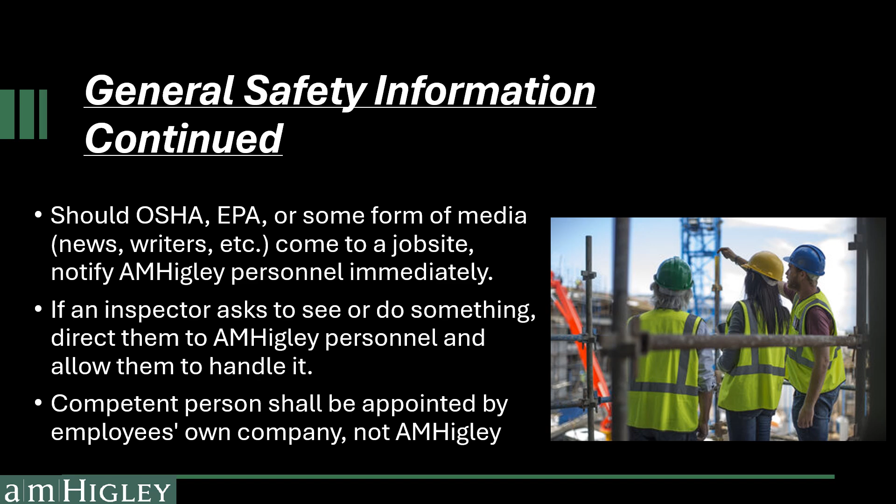A competent person is defined as one who is capable of identifying existing and predictable hazards in the surroundings or working conditions which are unsanitary, hazardous, or dangerous to employees, and who has authorization to take prompt corrective measures to eliminate them. AMHigley is not responsible for appointing competent persons for subcontractors on a job site. It is the subcontractor's responsibility to appoint their own competent persons.

All safety documentation will be completed and uploaded in HammerTech. This is the software system that AMHigley uses to keep track of orientations, inspections, trainings, and meetings. Through your smartphone or iPad, you will be able to browse the HammerTech website and submit different documents to AMHigley.

Each week, toolbox trainings and weekly huddles must be completed and submitted. Additionally, equipment inspections, trench inspections, hot work permits, confined space permits, and excavation permits must be completed before first use or work begins. QR codes are posted in the job trailer that will take you directly into HammerTech to complete the various inspections, permits, or forms.

If you are a foreman for your company, our AMHigley superintendent will add you as a nominated representative, so you have access to upload the required documentation. After the orientation, please get with the superintendent so they can show you how to complete and upload the required paperwork while on site. Thorough instructions on how to use HammerTech can be found under the Documents tab.

We do enforce a safety violation policy. A Category 1 safety violation simply means that the exposure to a hazard, if not corrected immediately, could result in an incident leading to serious injury, significant property damage, or in extreme cases, death. Examples are lack of fall protection for anyone working at or above 6 feet, improperly protecting trenches and excavations, not following confined space procedures, lockout-tagout procedures, etc.

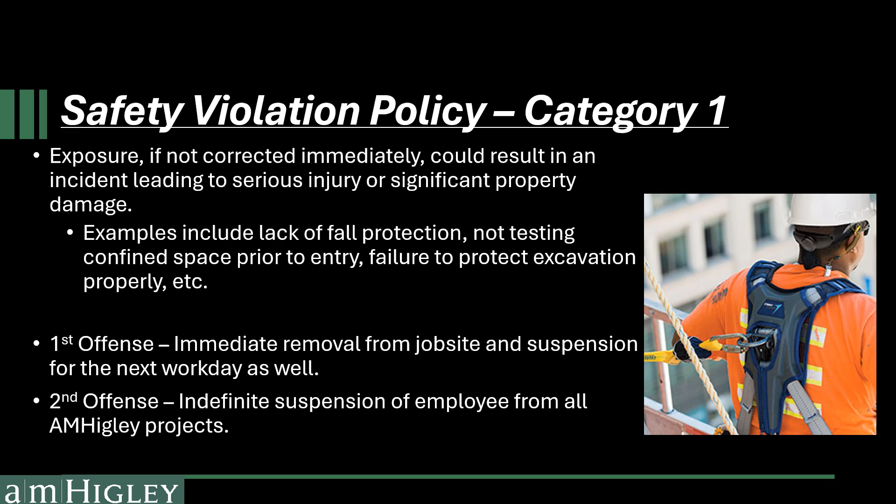The employee's supervisor will receive a Category 2 violation for lack of oversight to the employee not following work procedures or from failing to set up the worker with proper equipment. Upon your second offense, you will be suspended indefinitely from all AMHigley projects.

Our other type of violation is a Category 2 violation. This category entails a hazard that, if not corrected immediately, could lead to injury or minor property damage.

Your first offense will lead to a written warning. Second offense will lead to another written warning. Third offense will lead to a suspension from the project for the rest of the day, plus the following workday. Examples include failing to wear PPE, not having silica engineering controls in place, ladder usage, and more.

Violations stay on your worker profile for 1 year, but may stay on for longer periods due to the severity of the hazard. If 3 or more workers are found without PPE, a violation will be issued to the foreman for lack of oversight to the employees not following work procedures. Lastly, failure to sign and acknowledge any safety violation will result in immediate suspension from all AMHigley projects.

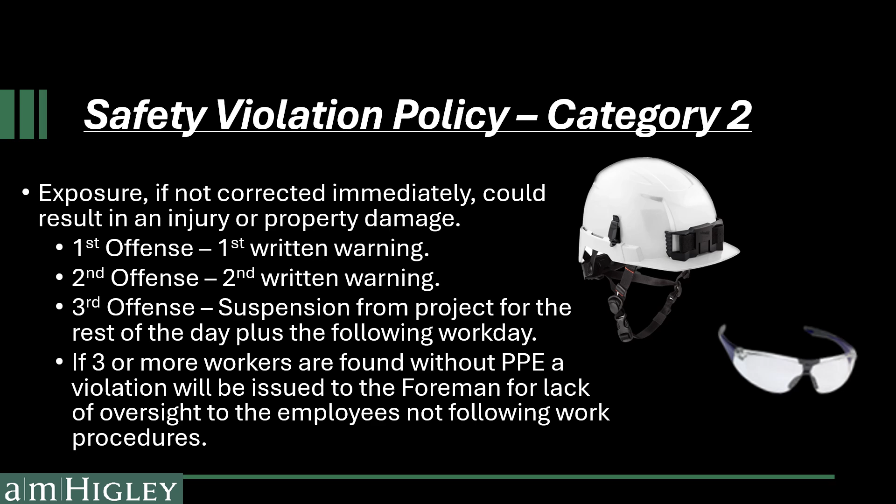When setting up a job site, one of our greatest priorities is public safety. We must take necessary actions needed to protect and maintain the public use of roadways, sidewalks, entryways into buildings, lobbies, corridors, and more. Roadwork must be set up correctly with barricades, signage, and reflective devices.

When necessary, sidewalks shall be protected with sidewalk sheds, canopies, catch platforms, fences, guardrails, barricades, shields, and more. If we must obstruct the use of sidewalks, ramps, stairs, or walkways, we must create a new temporary safe route for the public to use.

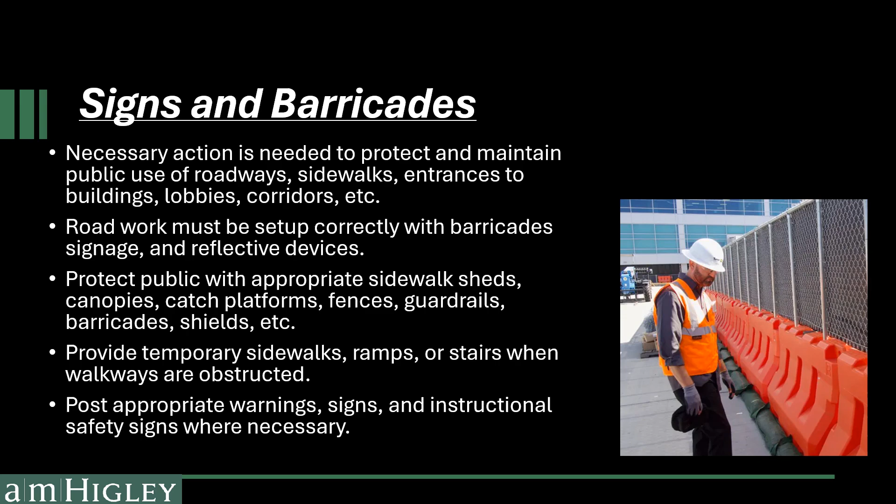Appropriate signage shall be posted around the job site. Signs posted on fencing around job sites may say the site is a construction area, no weapons allowed, no smoking allowed, PPE required, and more. It is important to make clear to the public that there is a construction site ahead of them and there is restricted means of access.

Proper housekeeping reduces unnecessary and avoidable hazards such as slip, trip, and fall hazards. Cleaning your work area routinely will help eliminate these hazards for you and those around you. When sweeping debris and dust, always use sweeping compound, HEPA vac, or water misting to control airborne dust. Refer to the manufacturer spec sheet and guidelines on how much sweeping compound to use per the square foot area.

Impalement hazards shall also be protected on a job site. This includes, but is not limited to, rebar, steel form pins, nails and debris, and more. Anytime you are using stairwell pan treads that are not filled in as a means of access to another level, you must temporarily fill in the pans to eliminate tripping hazards.

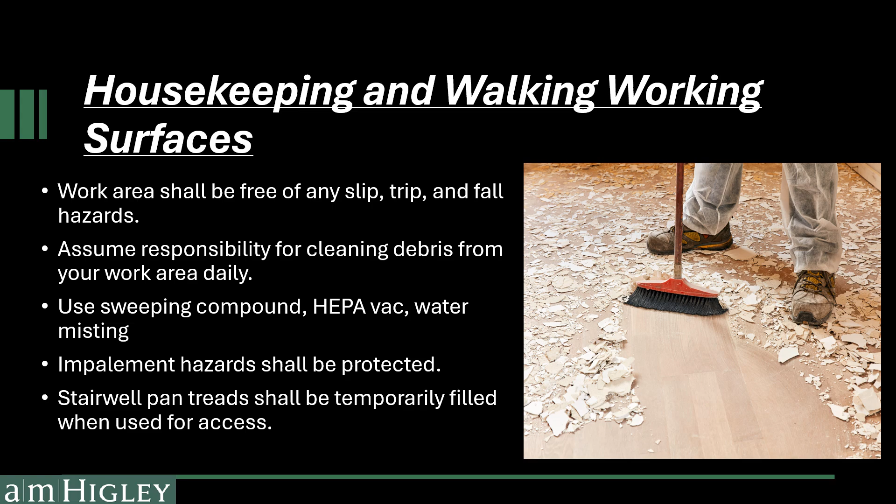We require anyone that is on a job site to always wear PPE. Your helmet and safety glasses shall always be worn. If you wear prescription glasses, they shall be ANSI Z87 rated for impact resistance with side shields.

When working at a decibel level at or greater than 85, you should be wearing hearing protection. A good rule of thumb to know whether you are working at a decibel level greater than 85 is if you must raise your voice to have a conversation with someone. Activities that commonly raise decibel level to this point are drilling, chipping, grinding, and cutting.

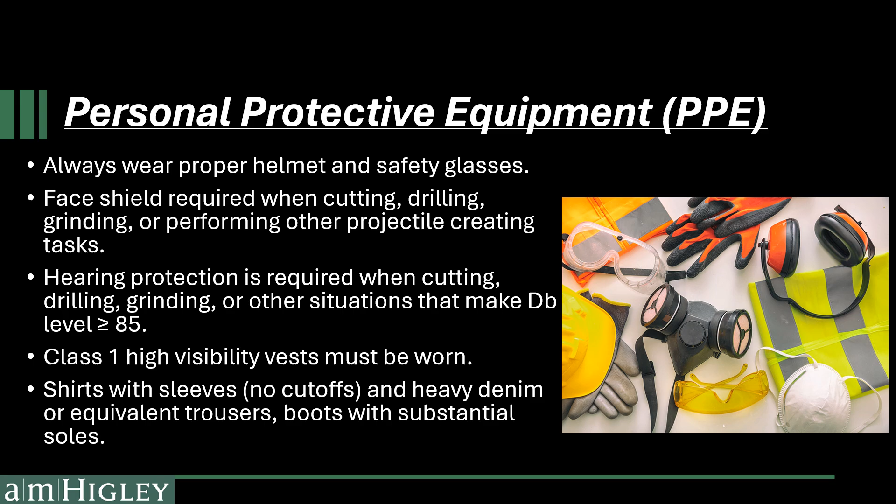We require a Class 1 high visibility vest when working near moving equipment or vehicle traffic. You shall always wear shirts with sleeves, heavy denim or equivalent trousers, and boots with substantial soles. Tree clearing tasks require a helmet, hearing protection, full face shield, leg protection such as chaps, and work gloves.

Continuing on the subject of PPE, here are some of AMHigley's helmet requirements. Workers are required to wear EN 12492 or ANSI Type 2 helmets. These helmets shall have a strap attached to them that shall be buckled around the chin at all times, with no more than 2 finger widths of slack between the strap and chin. If you do not have one of these helmets, notify your supervisor immediately following the conclusion of this presentation, and one will be provided at the cost equal to AMHigley's cost.

A fire extinguisher must be within 100-foot travel distance of any work and clearly visible with a monthly and annual inspection tag. When inspecting the fire extinguisher, check accessibility, examine the physical state, check the gauge, look for damage, and make sure to sign off on the fire extinguisher inspection tag when finished.

All flammable or combustible liquids must be stored in an appropriate container. No more than 25 gallons of flammable liquids shall be stored in a room outside of an approved storage cabinet. Gasoline and diesel must be stored in a metal gas container with a flame arrestor. No plastic gas storage cans are permitted. A fire extinguisher must be located no closer than 25 feet and no further than 75 feet from the storage area. Carbon monoxide monitors must be used when any powered equipment or fuel-powered heaters are used indoors.

When not in use, all compressed gas cylinders must be stored upright, secured, and with valve caps in place. Additionally, all oxygen cylinders must be separated from fuel cylinders by at least 20 feet or by a 5-foot tall non-combustible barrier with a half-hour fire rating. If fuel storage tanks are to be utilized, they must be protected from vehicle traffic by jersey barriers and equipped with a spill kit and be bonded and grounded.

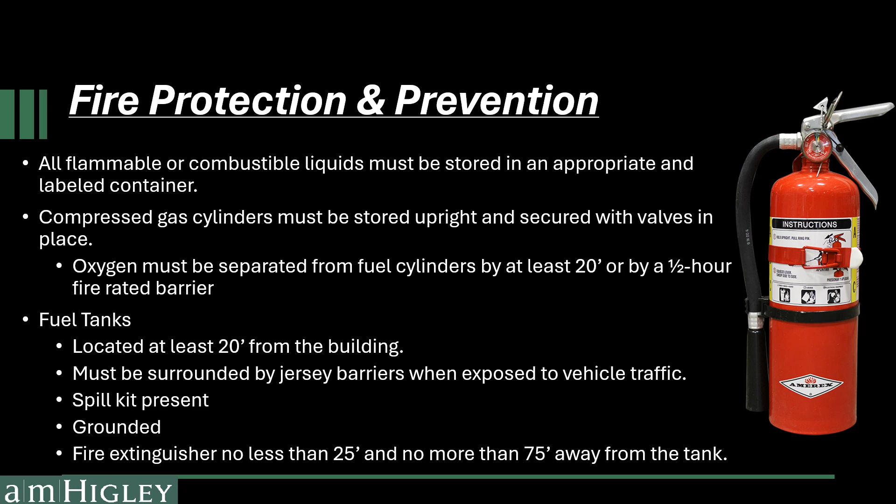When using hand or power tools, it is important to use them only for their intended purpose. Otherwise, tools can pose a hazard. Tools being used shall not have any defects, otherwise they shall be removed from service. If a tool is designed to accommodate guarding, then guarding shall be used. For example, table saws must always have guards in place.

Do not throw tools as a means of transferring them from one place to another. Do not raise or lower a tool by using its power cord. If operating a powder-actuated tool, discard unspent and partial cartridges in a bucket of water until ready to dispose of properly. Any defective tools must be red tagged and removed from service.

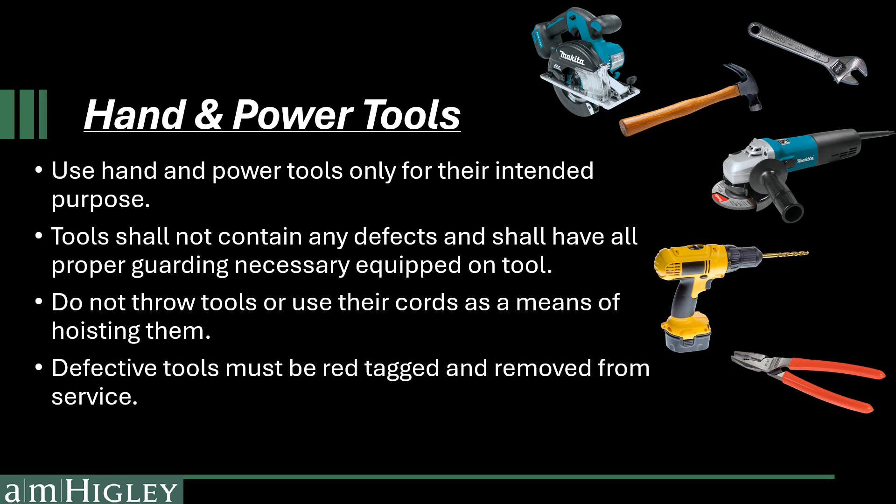Before using a ladder, always inspect the ladder prior to use. Make sure you check for the load capacity rating. If you cannot find this label, it must be taken out of service. Inspect the ladder for missing or loose rungs or steps, damaged slip feet, cracks, corrosion, spreaders, holes, and do not fasten anything to the ladder.

Do not use a ladder outside of its intended purpose. This includes not standing on the top cap or top step of a portable ladder. Do not use a portable ladder in the lean position unless it was designed to be used for that purpose, such as a lean-safe ladder.

When using an extension ladder, ensure it is set up correctly using the 4-to-1 rule. For every 4 feet the ladder rises, the base needs to be 1 foot away from the wall. This allows for maximum stability.

When an extension ladder is used for access to an upper landing surface, the ladder side rails must extend at least 3 feet above the upper landing surface to which the ladder is used to gain access, and be secured to a rigid support. Always maintain 3 points of contact on the ladder when climbing. Keep your body near the middle and always face the ladder.

Anytime there is a break in elevation of 19 inches or more, a ladder or stairway must be provided.

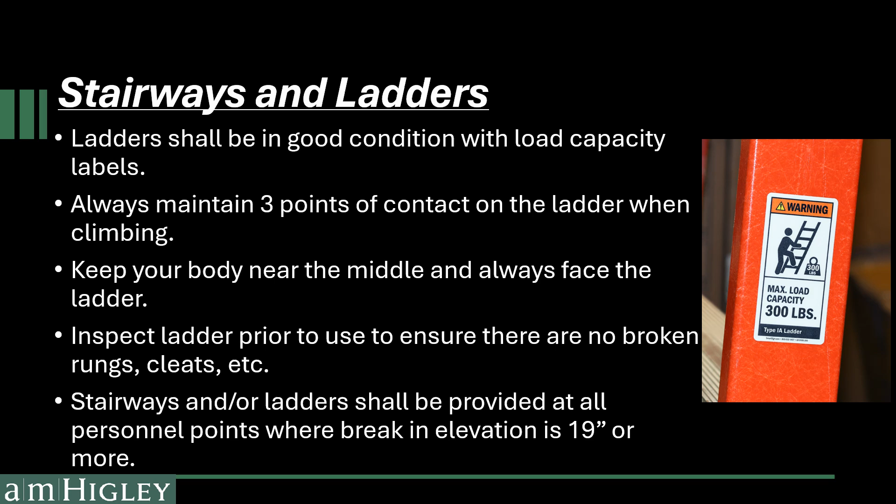Moving into electrical hazards. When using extension electrical cords, there are a few things you should be looking for. The biggest issue we see with electrical cords is a lack of general organization. Cords shall be organized in a manner that will not damage the cords. This means things like not laying the cords on metal track or pinching them in doors.

Cords shall also be organized in a manner that keeps them from posing housekeeping issues such as tripping hazards. All cords, temporary heating lines for the winter months, and any others shall be elevated with quick hooks or other non-conductive material to prevent a trip hazard.

All cords shall be equipped with a grounding pin, and there shall also be no insulation damage or tape repairs to the cords. Do not daisy chain cords.

When an energized electrical junction box is present, it shall be protected from incidental contact as well as water with a cover plate on. All electrical cabinets and panels shall be locked, have a locked electrical room door, or individually lock and tag out each breaker.

Also, there shall be no debris restricting access to the area. All temporary lighting power splices shall be protected from incidental contact.

Unless the repair's quality is equal to that of the cable, repaired cables are not permitted. Approved repairs are those that are repaired with rubber and friction tape or other equivalent insulation.

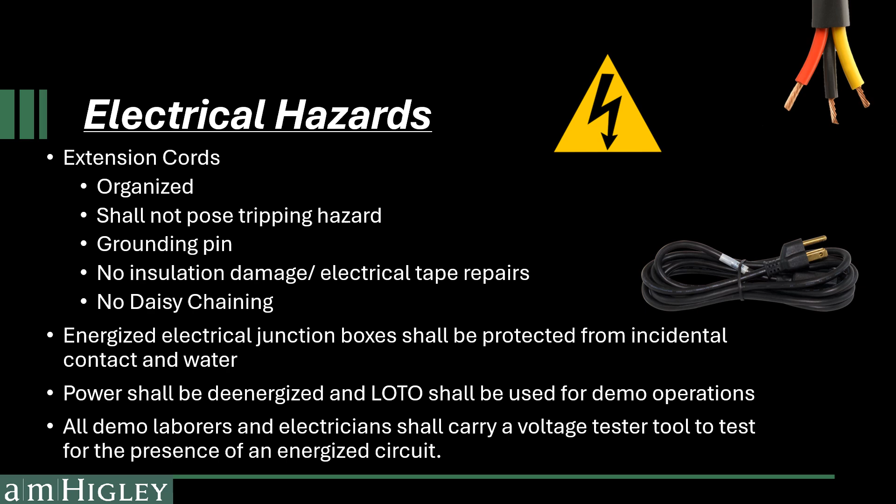When a demo operation is taking place, power shall be de-energized and lockout tag-out should be utilized. All demo laborers and electricians shall always carry a voltage tester on them to test for an energized circuit.

Moving along with fall protection. Anytime you are planning on working from heights, a pre-work meeting and a job hazard analysis must take place to discuss tasks, hazards, and how your company plans to eliminate and control the hazards.

There is no safe distance from an unprotected side or edge that would render fall protection unnecessary. We require anyone working at or above 6 feet to have a fall protection plan, whether it be a guardrail or a personal fall arrest system or restraint system, which consists of an anchorage, body wear, and connecting device. This also includes working at or above 6 feet on scaffolding and steel erection.

You must be tied off 100% of the time when working at a height at or greater than 6 feet when a guardrail is not present. Also, you are required to have a rescue plan in place if somebody would fall.

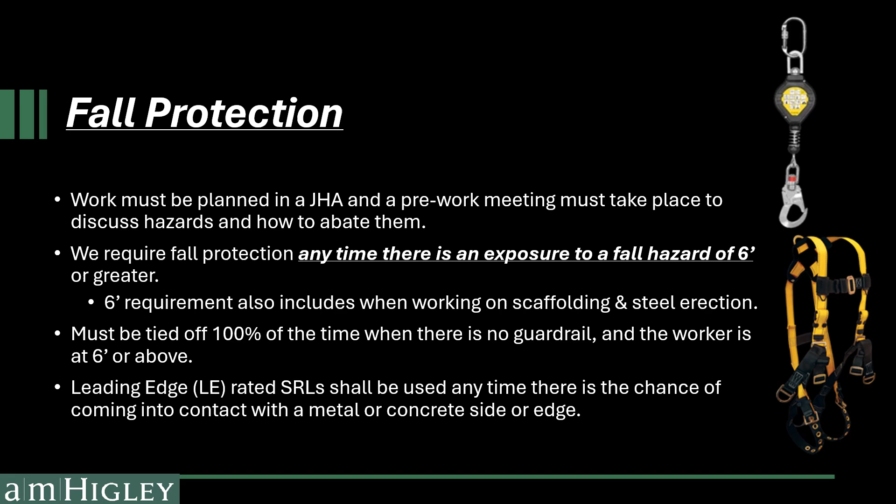There is a limited amount of time to rescue someone in the event they have a fall, so it is better to have the rescue plan devised prior to the fall rather than during the rescue.

When you are using a personal fall arrest system, your anchorage point must be able to support 5,000 pounds of force per person attached. When using a temporary hinge anchor or other types, always refer to the manufacturer instruction manual to know what the anchor capabilities are and what it is designed for, such as wood, metal, or concrete.

Also, know which type of fastener to use, how many fasteners are required, and the correct layout of the fasteners on the anchor, so the anchor will meet the 5,000 pounds of force. Inspect your fall protection equipment before you use it each time.

Ensure your body harness impact indicator shows no signs of deployment, no corrosion, cuts, burns, paint damage, and is adjusted correctly with dorsal D-ring between your shoulder blades.

Ensure the connecting device is rigged such that an employee cannot free fall more than 6 feet.

Body harness must be equipped with suspension trauma straps. Should warning lines be chosen as the fall protection plan, they shall be a minimum of 15 feet back from the unprotected side or edge, unless you are a roofer, in which they can be 6 feet from the unprotected side or edge.

Guardrail systems are in place with top rail at 42 inches plus or minus 3 inches and can support 200 pounds in any outward or downward direction. Mid-rail can support 150 pounds, and a toe board at 3.5 inches can support 50 pounds of force. If using wire rope as guardrail, it must be flagged at 6-foot intervals.

Any openings 30 inches or higher and 18 inches or wider in a wall or partition shall be protected. Any gaps, voids, or holes 2 inches or more shall be covered, secured, and labeled as hole cover, or they shall be color-coded. They shall also be capable of supporting twice the weight of employees, equipment, and materials.

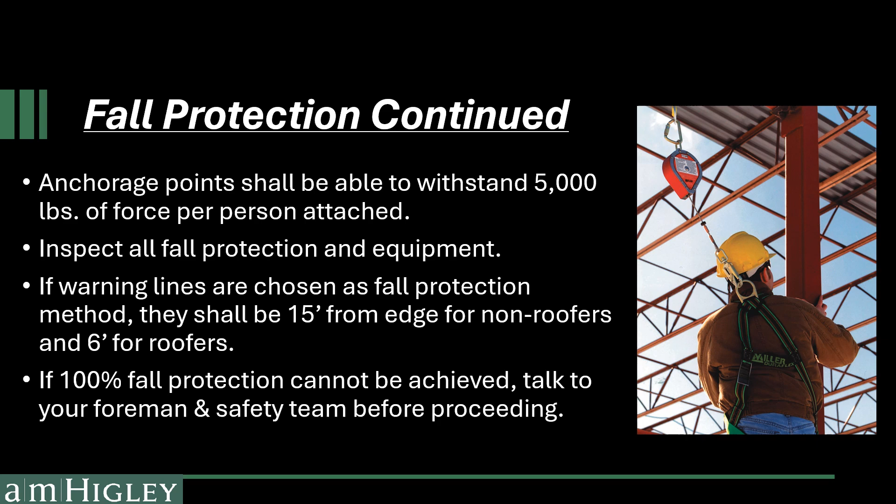If you don't believe that you can safely achieve 100% fall protection, talk to a member of the safety team prior to starting work. We will work with you to figure something out safely and effectively.

When using scaffolding, there are a few key points to keep in mind. First, scaffold shall be inspected and documented prior to every shift. When erecting or dismantling scaffolding, a competent person needs to be on site to inspect and ensure the procedures are safe. A personal fall arrest system shall be used, unless it is deemed infeasible.

Guardrails or a personal fall arrest system is required when working at 6 feet or greater. Your personal fall arrest system must be equipped with a self-retracting lifeline. This is to ensure your safety in the event of a fall.

Scaffolds and their components shall be capable of supporting, without failure, at least 4 times the maximum intended load. Also, scaffold shall be set up correctly with proper cross braces, base plates, fully planked, pins in place, lock casters, and mud sills if necessary.

Outriggers are for personnel use, not for storage of materials, and shall be equipped with end gates or guardrails. Access to the ladder to climb a scaffold shall not be more than a 2 foot step up, and access to step onto a platform shall be no more than 14 inches.

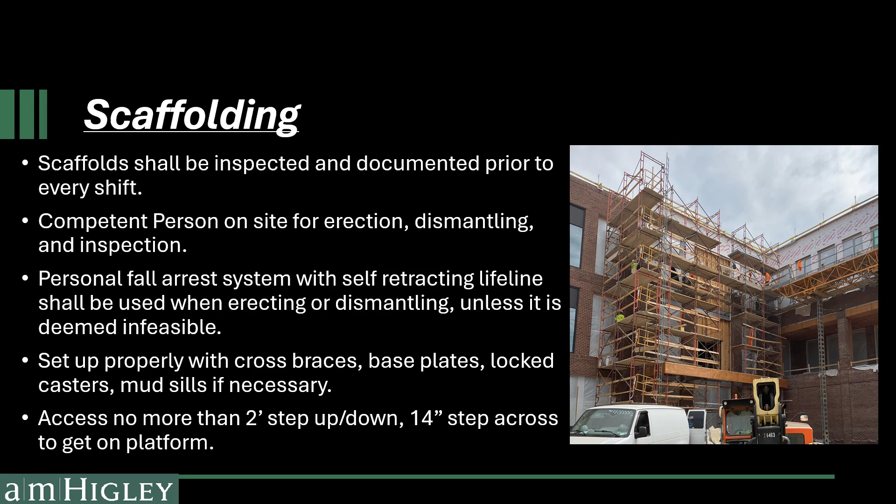When set up, guardrails shall be present on all sides of the scaffold, including scaffold ends and material loading stations. Planks shall extend 6 inches over the edges of the scaffold, and they shall overlap each other by 12 inches. Minimum power line distance shall be no less than 10 feet.

Now let's talk about some general information about mobile elevating work platforms, which are scissor and boom lifts. In order to operate one, you must be a trained and qualified person. A daily inspection is also required to be completed in HammerTech.

We also require that anyone working in a scissor lift be anchored when working at or above 6 feet in a lift. When working in a boom lift, you shall always be anchored with a self-retracting lifeline, not a 6-foot shock-absorbing lanyard.

All mobile elevating work platforms shall have an annual inspection that takes place once every 13 months, as well as a frequent inspection which takes place every 3 months, or every 150 hours of operation, whichever comes first. If the lift does not have this inspection, contact your supplier.

Do not stand on the toe board, mid-rail, or top rail of the lift. Do not place material in the bottom of a boom lift to prevent airflow, such as rigid foam board. Do not screw any materials to the lift frame.

Only a manufacturer glazier kit is allowed to be fastened to a boom lift to reduce manual work for carrying material to heights. If using a glazing kit, ensure the load is secured to the lift when transporting materials.

Also, when operating a boom lift, maintain a clear area around the base and circumference of the boom lift to prevent any tools or falling objects from landing on crew members and personnel. The boom lift circumference is often quite large and shall be caution taped to keep the area clear.

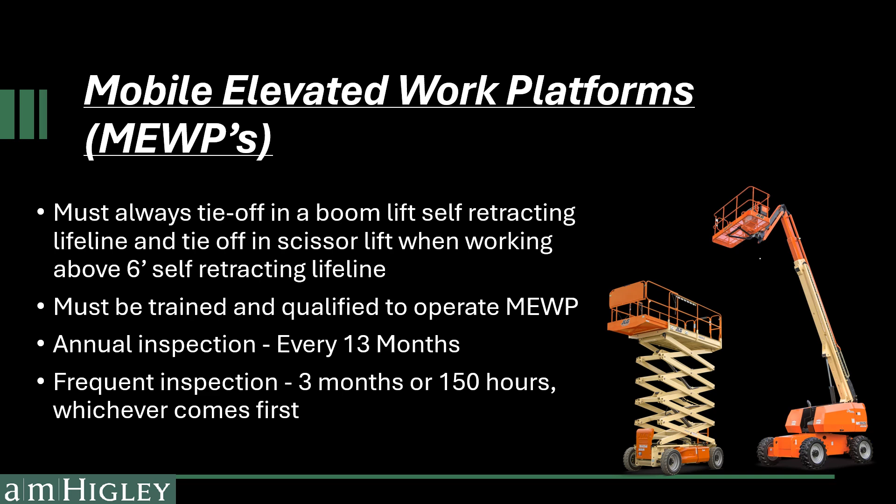Communicate closed areas, doorways, and new pathways with signage to all employees. Always ensure that you have a minimum clearance from power lines of at least 10 feet.

Just like mobile elevating work platforms, heavy equipment shall be inspected daily and documented in HammerTech prior to using. If you are operating a forklift, you shall be a trained and qualified person. When operating heavy equipment, follow the manufacturer's requirements and always wear your seatbelt. All operators are required to wear safety glasses while in the equipment cab and shall not smoke in the cab.

When you are working in an area where heavy machinery is being used, you are required to wear a Class 2 high visibility vest to ensure the best chance for the operator to see and avoid you. When operating heavy equipment, always ensure that you have a minimum clearance from power lines of at least 10 feet.

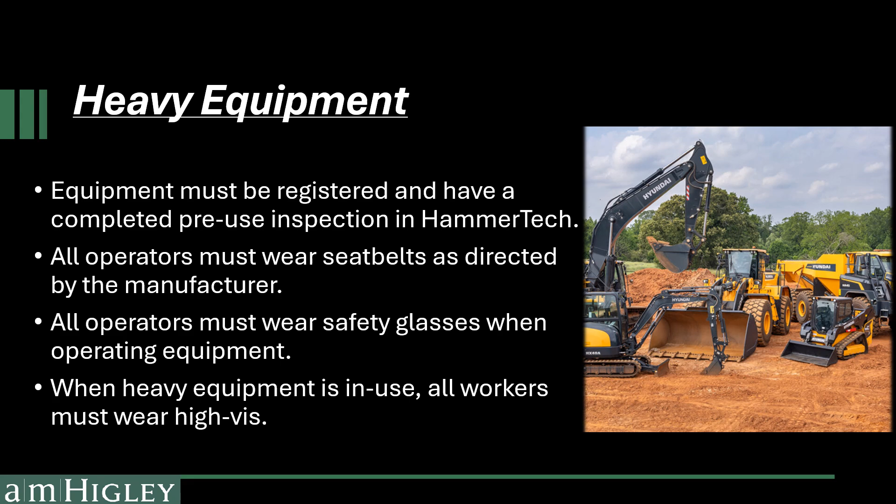Hot work is any work that uses or causes flames or sparks. This includes burning, welding, cutting, grinding, cutting metal studs with a chop saw, and more. When conducting hot work, a hot work permit must be completed each day it is being performed.

When performing any kind of hot work, you should have a fire extinguisher ready at the location where the work is being carried out. Welding curtains and spark shields shall be used when necessary. A dedicated fire watch shall be present at all welding operations and remain for 30 minutes after work is completed. People performing hot work and people working around hot work shall be in proper PPE, such as welding hoods or full-face shields.

Crystalline silica is a common mineral that is found in construction materials such as sand, stone, concrete, brick, and mortar. When workers cut, grind, drill, or crush materials that contain crystalline silica, very small dust particles are created. These tiny particles can travel into workers' lungs and cause silicosis, an incurable and sometimes deadly lung disease.

No dry sweeping of silica dust is allowed. This poses the same hazard as exposing dust by cutting. You must have either a respirator or a dust suppression system, such as spraying water on airborne dust. Follow the Table 1 standard for guidance. If the task being carried out is not in Table 1, then an exposure assessment shall be conducted.

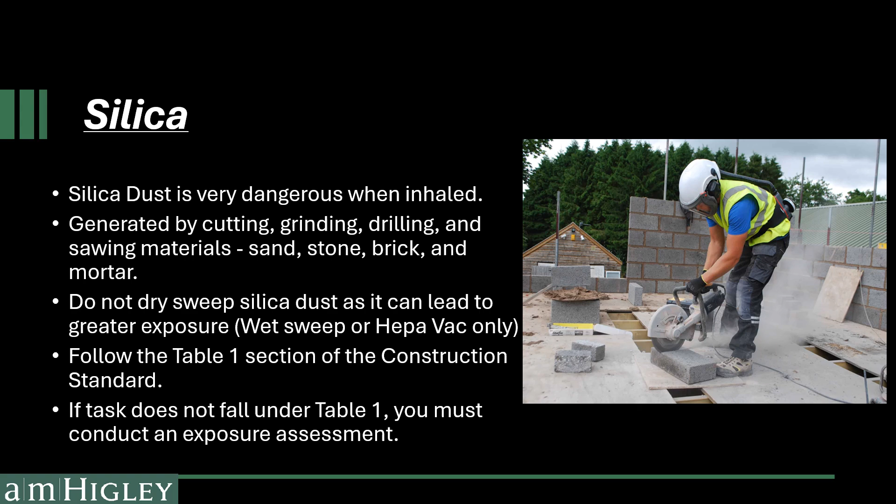Mixing mortar, concrete, or other self-leveling material products are not activities that are covered in Table 1. When working with mixing towers, an exposure assessment must be conducted or objective data can be used. The objective data must reflect workplace conditions closely resembling or with a higher exposure potential than the processes, types of material, control methods, work practices, and environmental conditions in the employer's current operations.

A respirator must be worn when working with a mixing tower until the results from the exposure assessment come back, and a fit test must be completed prior to use. When setting up your mixing tower, be sure to set it up downwind of where other trades are working to minimize risk for other people.

If weather conditions change or the number of mixing bags used per day increases, then a new exposure assessment must be completed.

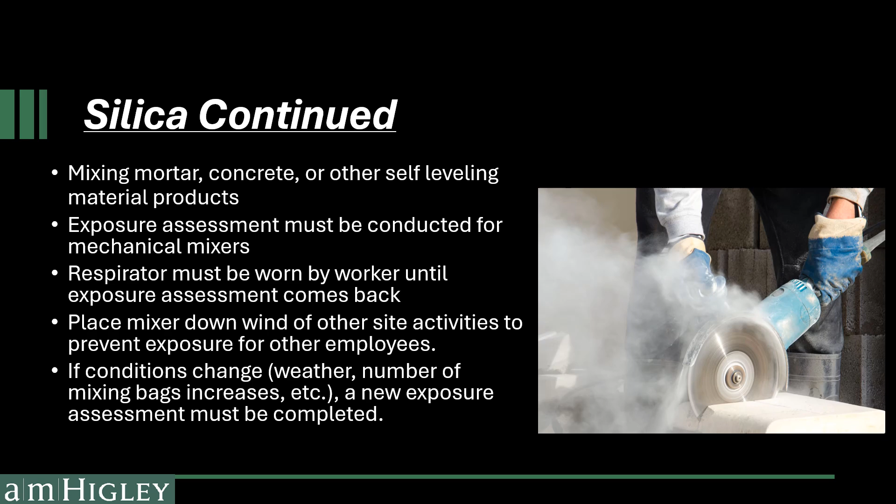Now for a little bit about trenching and excavating. Before beginning an excavating task, an excavation permit shall be completed to identify the utilities with markings. This can be done by calling the underground utility services. Afterwards, a daily inspection must be completed by a competent person.

Once the utilities are located, hydrovac when within 36 inches and every 50 feet to ensure the utility location has remained the same. Now that the area has been surveyed with markings, it's time to conduct a visual and a manual test. This will help determine the soil type, A, B, or C, which will also help you determine what type of protection will be needed.

Remember, type A is a 3/4:1 ratio. Type B is a 1:1 ratio. Remember, to bench correctly in type B soil, add the first vertical wall with the second vertical wall to get the first horizontal bench shelf. Type C is a 1.5:1 ratio. Type C soil is not a cohesive soil, so benching is not allowed in this soil.

Ensure the trench box tabulated data is on site, and the maximum distance between the bottom of the trench box and the bottom of the trench shall be no more than 2 feet. Keep spoil piles at least 2 feet back from the excavation or trench. Walkways shall be provided where employees or equipment are required or permitted to cross over excavations 6 feet or more in depth and wider than 30 inches at the top.

Anytime rain, snow, and environmental conditions change, another daily inspection must be completed again as weather can change the characteristics of the soil. This checklist can be found in HammerTech. When working in trenches at 4 feet or greater, a means of egress is required every 25 feet of horizontal travel in the trench. When working at 5 feet or greater, a means of protection is needed. An example of this would be sloping, benching, shoring, or shielding with a trench box, or other options deemed safe for the soil type by the competent person.

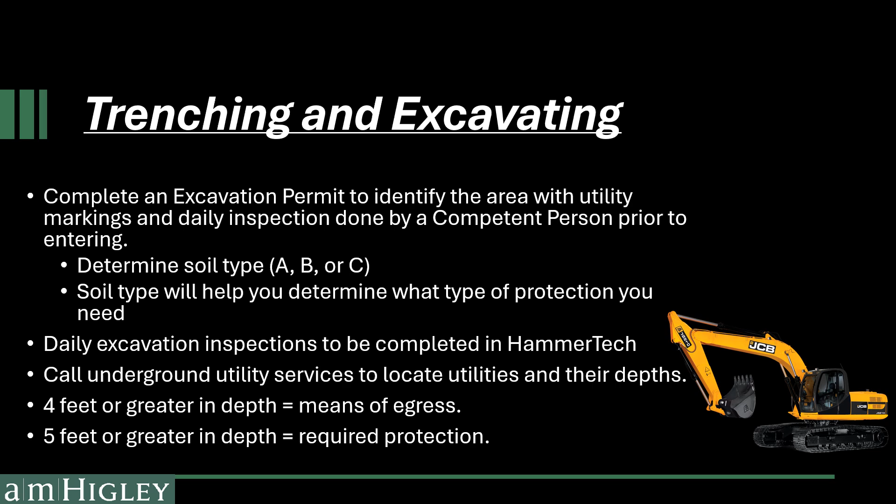Daily crane inspections are required and can be found in HammerTech. The daily inspection shall be filled out by a competent person before each shift.

When a crane is being erected or dismantled, anyone working on the crane from a height of 6 feet or greater must be protected from fall hazards.

A critical lift is any lift where the weights are at or over 75% of the rated capacity of the crane and rigging. Critical lift procedures and documentation are required to be submitted for approval prior to the lift. Only qualified crane, signal, and rigging persons shall perform such procedures.

Ensure outriggers are fully extended, cribbed, and on sturdy ground. Keep crane swing radius barricaded, and ensure taglines are used on loads. Be sure there are no overhead obstructions and workers are clear of the overhead flight path. If crane is near power lines, keep appropriate distance.

Remove any defective equipment from service. Ensure rigging equipment is inspected and tagged prior to use. Any equipment with tears, frays, kinks, worn spots, etc. should be removed from service immediately.

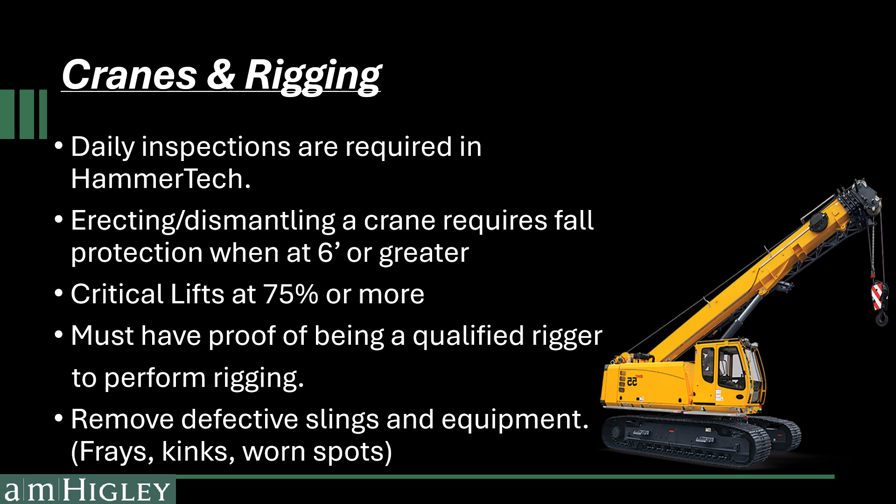Moving along into confined space. A confined space is a space that is large enough and so configured that an employee can bodily enter it, has limited or restricted means for entry and exit, and is not designed for continuous employee occupancy. All three criteria must be met for a space to be considered a confined space.

Common examples of confined spaces include, but are not limited to, manholes, crawl spaces, tanks, silos, elevator pits, electrical cabinets, air handling units, attics, etc.

Just like many other tasks, you shall fill out the pre-work form when entering a confined space. Reach out to the safety manager, and they will assist you in filling this form out.

This form will help you determine if the confined space is deemed a non-permit entry, alternate entry reclassification, or permit required entry. Based upon which of these categories your space falls into, it will help you determine what equipment you will need and what precautions to take when entering a confined space.

If it is a permit-required space, the permit must be posted at the entrance of the confined space to ensure there is no confusion for workers entering the space.

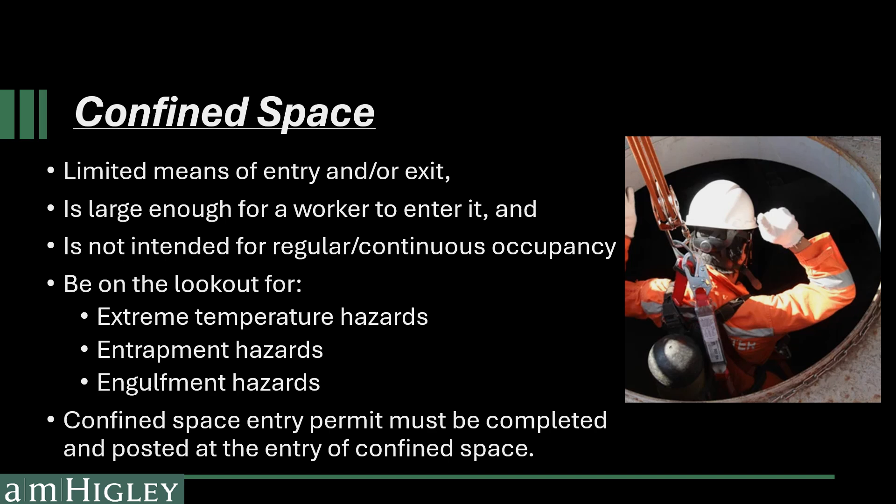When working in hot temperatures, it is important to remember to avoid heat illness. Heat illness is caused when your body cannot adequately cool itself off. These situations arise in hot and humid temperatures.

Some easy ways to prevent heat illness are drinking plenty of water or sports drinks, wearing light-colored clothing, avoiding caffeine throughout the day as it can cause dehydration, and taking frequent breaks in a cool and shaded area.

When someone is experiencing heat illness, the most common signs are confusion, headache, nausea, dizziness, heat rash, hot skin, cramps, and a lack of sweat.

At 80 degrees Fahrenheit, your employer must provide cold water for you to drink and allow you to take brief breaks in the shade throughout the shift.

If you are completely new to working outside in the heat, we recommend the use of the 20% acclimation method. This method means if your first workday is on a Monday, only work at 20% of the shift's full intensity. Then increase your workload by 20% each day until fully acclimated. Tuesday will be 40%, Wednesday at 60%, Thursday at 80%, then Friday will be 100% workload.

This is important because nearly 3 out of 4 heat illness fatalities occur in the first week on the job.

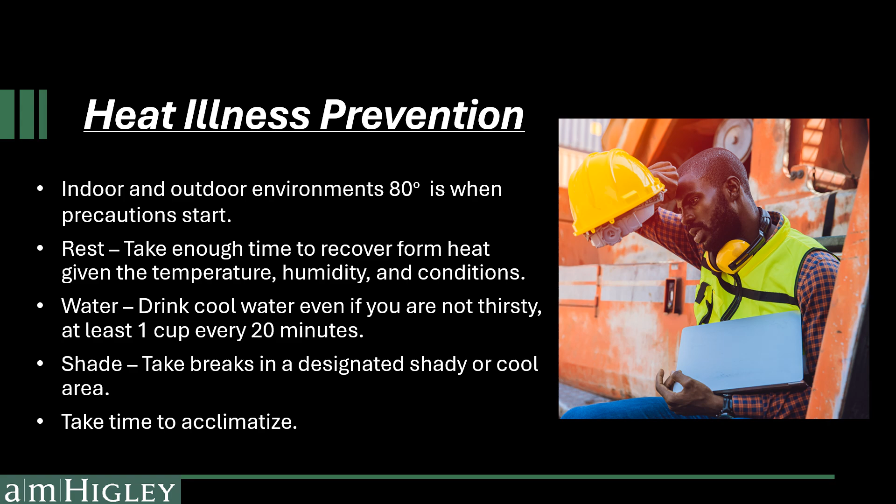We will wrap up with hazard communication. Prior to reporting to site, your office has submitted all the safety data sheets for any chemicals you will be using. These forms can be accessed by all workers by visiting the HammerTech project website.

This can also be accessed by rescanning the orientation QR code. If any chemical is to be transferred or mixed in a secondary bottle, like a small spray bottle, that secondary container must also have the appropriate globally harmonized system label.

When using chemicals on site, they must be used in accordance with the provided safety data sheet without affecting users or surrounding workers. Additionally, please read the safety data sheet in order to follow any PPE, ventilation, or storage requirements. Keep in mind, if the safety data sheet requires a respirator, you must be fit tested by your employer.

Finally, if any unforeseen hazardous or suspicious materials such as asbestos, lead, mold, or any other materials are discovered during demolition or other tasks, stop work and notify AMHigley immediately.

This concludes the video portion of the orientation. Please contact your superintendent at this time so they can review your quiz, approve your orientation, and review the site-specific information which includes the AED location, first aid kit, eye wash station, rally points for both internal and external locations.

Entrances and exits, smoking area if the project has one, parking, location of shaded area for heat illness prevention, toilets and hand wash area, local hospital, dumpster location, food waste, restricted areas, hazardous areas such as asbestos, lead, hazardous chemicals. AMHigley promotes a stretch and flex program, client requirements, and assigns a safety manager.